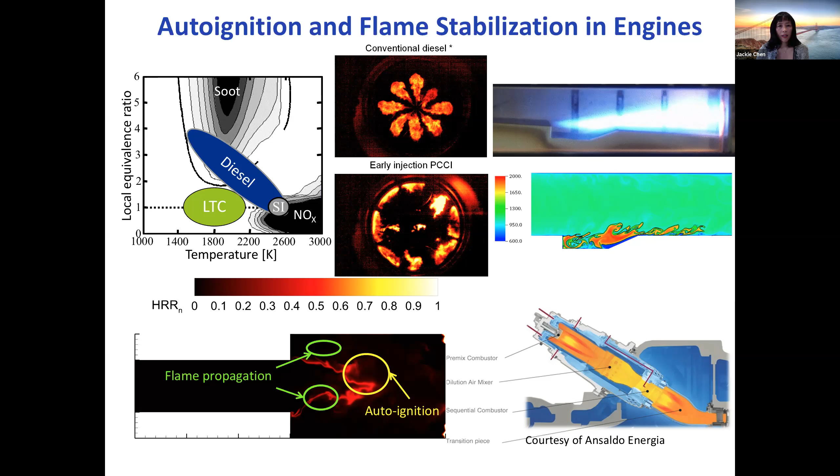So combustion will continue to be the dominant source of energy for ground transportation, for power generation, and for propulsion for several decades to come. And despite the expected growth in electric vehicle sales, both due to plug-in hybrids as well as battery electric vehicles, the global light-duty fleet, the passenger cars, will still be dominated by vehicles with internal combustion engines in the coming decades. And so there's a real need to improve the internal combustion engine efficiency as an important path to energy security and also to minimize and mitigate greenhouse gas emissions

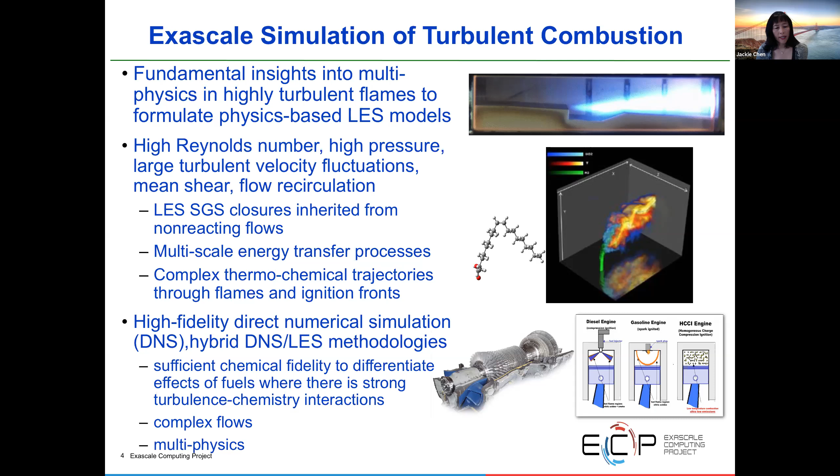So DNS, direct numerical simulation, is a fundamental tool where all of the fluid mechanical scales, from the largest energy containing scales down to the Kolmogorov scale, are fully resolved numerically using highly accurate methods. And then we couple this with reactive flow. And so it's a tool for understanding the micro scale turbulence mixing interactions that occur in combustion that are oftentimes very difficult to measure. The diagnostics and the environments are extreme, and so it makes it very hard to actually measure these small scale interactions.

But because in combustion, you don't burn things until they're molecularly mixed and react, those kinds of physics can have a very strong bearing on macroscopic quantities like the heat release rate or the fuel consumption rate, which may not be resolved in a typical engineering CFD, a Reynolds averaged Navier-Stokes solver, or in a large eddy simulation, where those small scale interactions are relegated to the subfilter models.

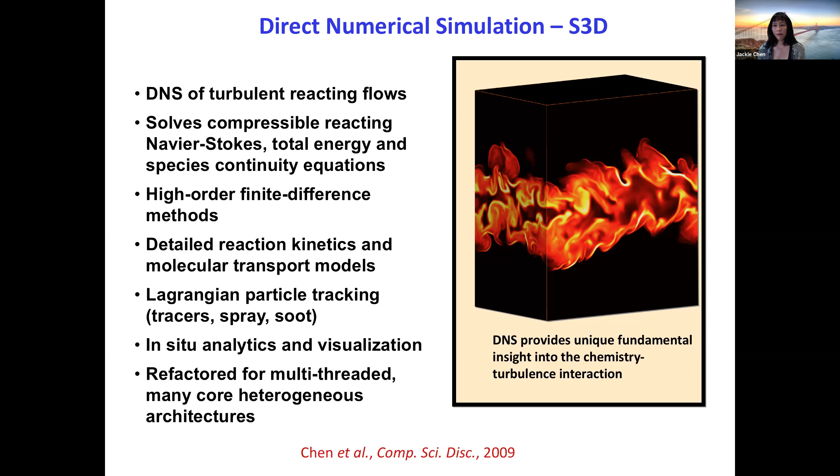So there are still some challenges outstanding in trying to understand mixed mode combustion. That is where you might have flames burning into a reactive or autoignited mixture. And so problems like autoignition, and in an IC engine, you traverse a very broad range of temperatures and pressures. And so you can encompass low temperature, intermediate temperature, and high temperature autoignition at the same time that you have premixed or partially premixed flames, cool flames or high temperature flames propagating into this reactive soup. Current models don't handle this sort of mixed mode combustion.

And so there are a number of technological questions, as shown in this picture, of how we can understand how to stabilize a diesel jet flame in this low temperature combustion regime where you burn with more EGR dilution to avoid the production of soot.

And in gasoline engines that are spark ignited, where there's a move to dilute heavily also with EGR, lean and dilute operation to minimize NOx formation. Likewise, in the propulsion arena, there are challenges with how to anchor high-speed flow in a scramjet, for example. What kind of bluff bodies or cavities are needed to help anchor the flame.

And then in gas turbines for power generation, there's a move to go to staged or sequential combustors, where the second stage would introduce hydrogen-enriched fuels that could be a byproduct of some of the renewable energy, that wind and solar that we're using, that are augmenting natural gas.

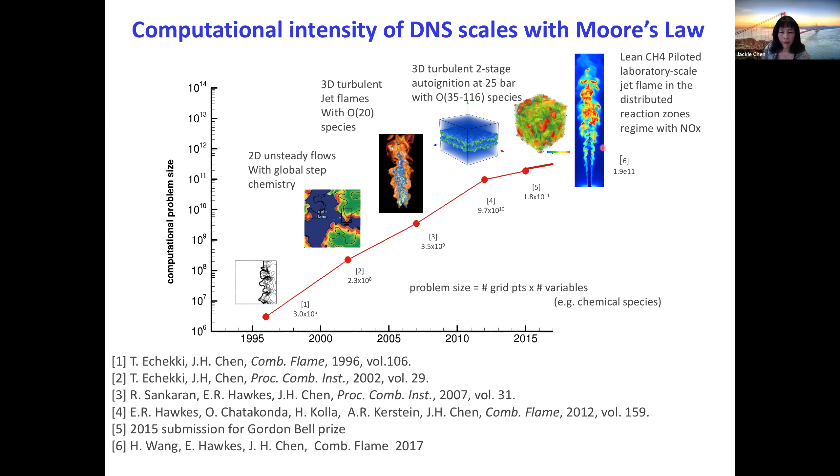In practical engines, these flows are at very high Reynolds numbers with large fluctuations sometimes in both pressure and turbulent fluctuations. They're often present with complex flows, not just isotropic turbulence, but within the presence of mean shear or flow recirculation. And by and large, many of the LES closures that we use today are inherited from our knowledge of non-reacting flows.

And so there's questions still about multi-scale energy transfer processes, dilatation and gas expansion that's generated at the small scales. Where do they move in the energy spectrum? And very, very complicated time histories through these thermochemical trajectories through flames and ignition fronts.

And so my effort has been to focus on high fidelity simulations, in particular DNS, as well as getting involved in hybrid DNS and LES methodologies. And we're doing this in a way that we can resolve the chemical fidelity sufficiently to be able to differentiate subtle effects in differences in fuels where there are very strong turbulence chemistry interactions.

Over the years, we've started to move from DNS in a box, the size of a tofu cube, now to more complex flows involving staged combustors and also more geometry and also multi-physics with sprays and soot.

The code that I've developed at Sandia over the years is called S3D. It's a compressible reactive Navier-Stokes solver, solving for the total energy and species continuity equations. Recently, we've included multiple temperatures, accounting for vibrational non-equilibrium in addition to just thermal equilibrium. We use higher order finite difference methods. We're 8th order in space, central difference, and 4th order in time using a 6-stage explicit RK method.

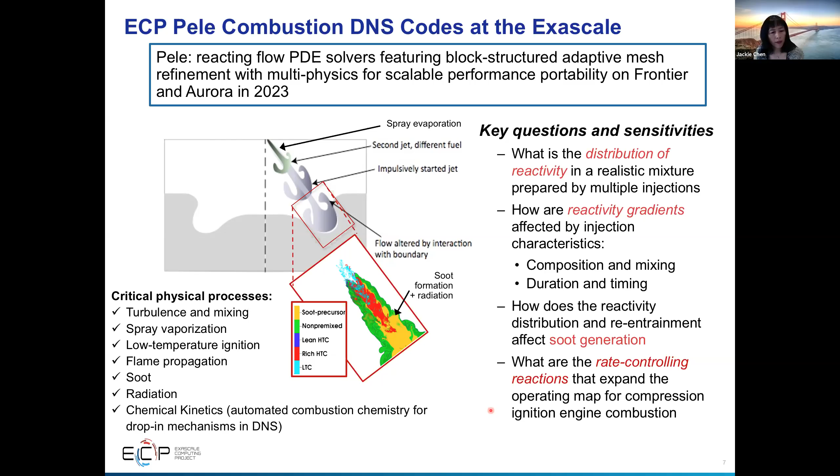To describe a practical fuel of interest, such as gasoline or a surrogate of gasoline, such as isooctane, can require hundreds, if not thousands, of species. And so a big part of our job is to identify reduced mechanisms that capture the accuracy in the regime in which we want to use it.

And so back in the early 1990s, we were only able to perform 2D DNS with somewhat complex chemistry, but really had no turbulence, you had no vortex stretching. And then as time progressed, we started to include 3D calculations with about 3.5 times 10 to the 9 mesh points, but with very simple hydrogen or methane chemistry. And then today, we're at the point now where we can actually simulate directly a smallish laboratory scale turbulent flame and do one-to-one comparisons in terms of the statistics sampled at different axial positions or however you want to analyze the data.

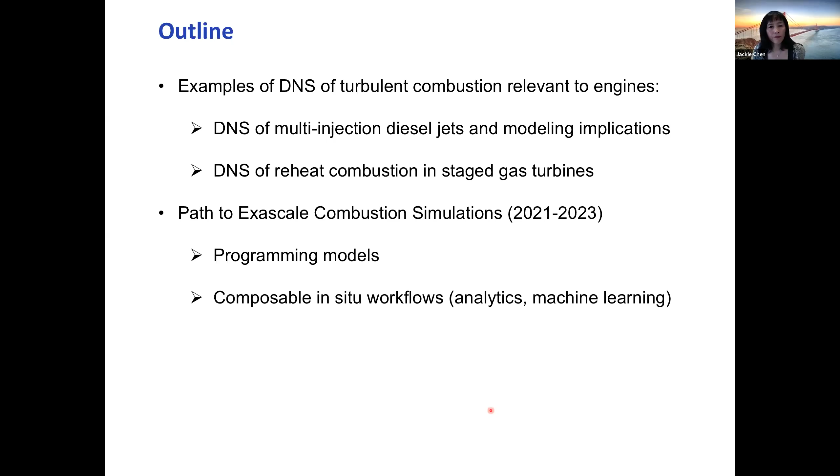And so this is a real accomplishment because we can now directly couple with experiments, and computation can inform one another of either new experiments to perform or new ways to analyze the data to extract information for model development.

Within the DOE, since about 2016, there's been a huge push to develop application codes, I think 22 or 23 application codes, along with a capable software stack with new hardware that minimizes power use, power footprint. And so in that exascale computing project, one of the applications is combustion. And I lead a project called Pele, which is reactive flow PDE solvers using block structured AMR with multi-physics, as I said, sprays, particles with soot and thermal radiation and embedded boundary capability in this code.

And our objective is to get scalable performance portability on the exascale machines that will be deployed in the next few years. And I should say this suite has two codes. One is a low Mach code where the acoustic waves are filtered out, and you can take time steps on the order of advection. And the second code is a compressible formulation capable of handling shocks and acoustic detonation types of phenomena. Both are coupled with the multi-physics modules for chemistry and thermodynamics.

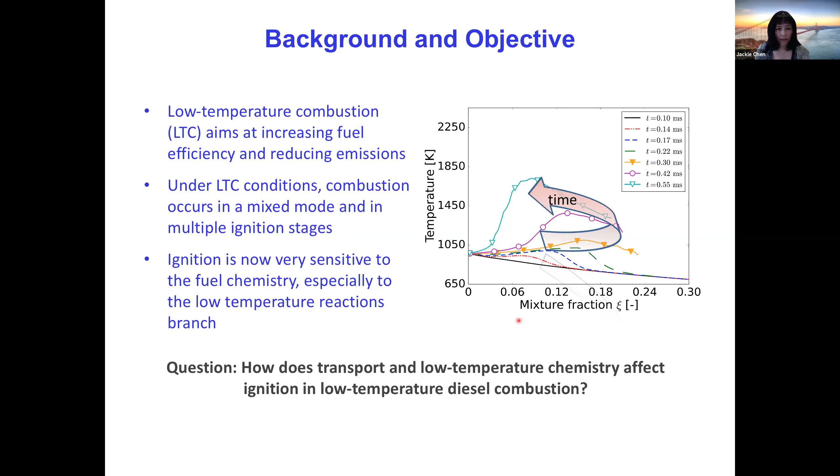And so some of the questions we want to address are: how are the reactivity gradients affected by the composition and mixing characteristics, the duration of a given injection and the dwell time between injections, how many injections, which fuels, which component, are these fuels multi-component? And then how does the reactivity distribution and re-entrainment affect downstream emissions generation for soot or thermal pyrolysis? What are the rate controlling reactions? Can we identify those that could help expand the operating map for efficient operation of these compression ignition engine combustion regimes?

As part of this Pele project, we are working closely with the chemical kinetics group at Argonne, coupled with Bill Green at MIT, and with Tianfeng Lu, that's based on ab initio theoretical calculations, and is tested using uncertainty quantification methods that would then be able to be reduced and produce drop-in mechanisms for our DNS. Previous to this, it would take years to develop a detailed chemical model, and then you'd have to pass it off to someone else to reduce it. And so by the time you could actually see these reduced models in our CFD calculations, it would be a very lengthy time. So we've shortened this enormously by developing this kinetics framework within this ECP project.

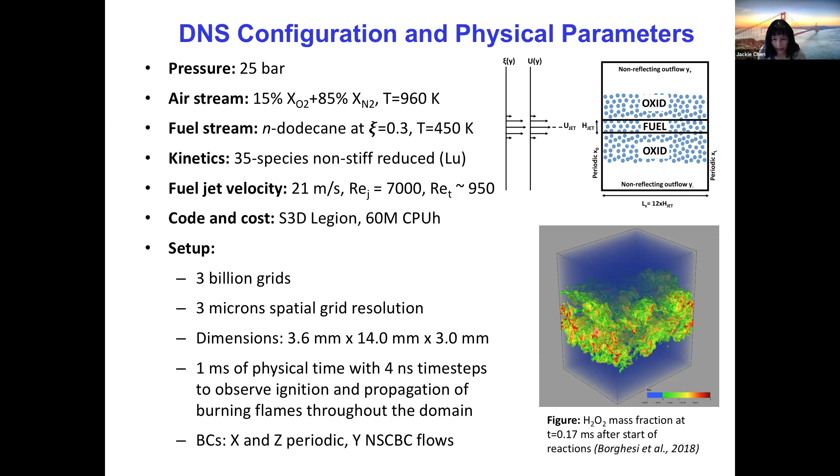Now I'd like to just present a couple of vignettes showing the capability of DNS on current petascale, produced on Summit at Oak Ridge National Laboratory. These are IBM and NVIDIA GPUs. I think there are 6, and I think there are about 4,000 nodes, a little bit over that on Summit. And so the first example has to do with multi-injection diesel jets and modeling implications. And the second example has to do with sequential staged reheat combustion in gas turbines for power generation.

And then I'll switch gears and talk about some of the computer science issues associated with how do you program these exascale machines. Are the current distributed programming models that we use with MPI and OpenMP sufficient, or do we need to look at some other programming models?

I'd like to also touch upon in situ analytics and a little bit about machine learning before I close. So the first vignette has to deal with autoignition under diesel-like conditions. We start with a simpler temporally evolving planar jet using S3D, and then we will move to a spatially evolving impulsive jet so that we could deal with multiple injections using the new code PeleLM. This is work that was done by my former postdocs, Giulio Borghesi, Alex Krisman, and in collaboration with Tianfeng Lu.

We were motivated by this problem because diesel combustion involves both multi-stage ignition as well as mixed mode combustion, as I pointed out earlier, under these low temperature combustion conditions. And there's a push, of course, to try to increase the fuel efficiency and reduce emissions, especially for heavy duty engines, for trucks, and for marine engines. And we know that ignition is extremely sensitive to the fuel chemistry and especially to the low temperature reaction branch.

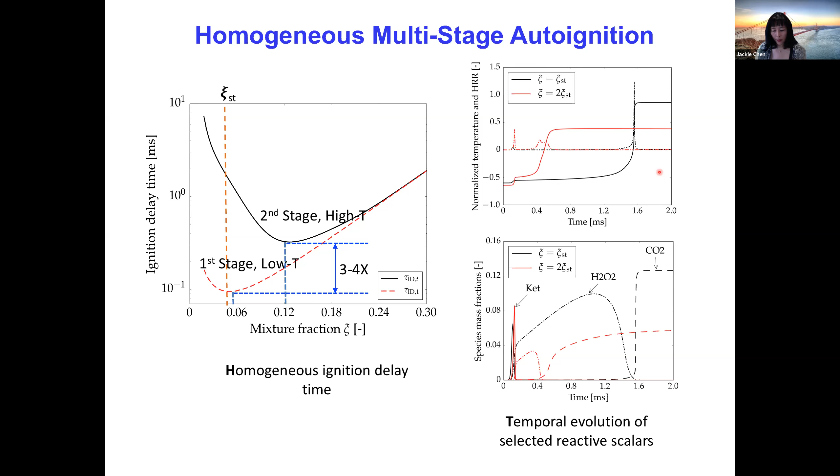This picture on the right shows the temperature plotted versus the mixture fraction and its evolution in time for diesel autoignition problems. Initially you have this mixing line, and then you start to see low temperature ignition processes happen near the minimum ignition delay time, which I'll describe in a minute. And then it propagates into richer mixtures where the delay time is longer. Eventually you get the first high temperature ignition by the time of this yellow line, where the temperature peaks on the very fuel rich side, and then it propagates back to stoichiometric conditions right around here, about 0.06. And so that's kind of the evolution.

So what we set up here, as I said, was a temporal slot jet where we have a partially premixed fuel slab at a mixture fraction of 0.3. This is a mixture fraction selected at a virtual origin downstream of where the liquid fuel has evaporated, because we're looking at a pre-vaporized mixture, a rich mixture at 450 Kelvin, and on either side of the fuel slab is the oxidant, which is reduced air with 15% oxygen, 85% nitrogen at a heated temperature of 960 Kelvin.

We ran this calculation at 25 bar. We wanted to be at 60 bar, which is where engine experiments were actually conducted, but the resolution requirements were prohibitive. We used a 35 species non-stiff reduced mechanism. The fuel jet was 21 meters a second. This gave us a jet Reynolds number of 7,000, a turbulent Reynolds number of just under 1,000. This was run with the code S3D Legion, which I'll talk about later in my talk, and required 60 million CPU hours running on Titan and also on Summit.

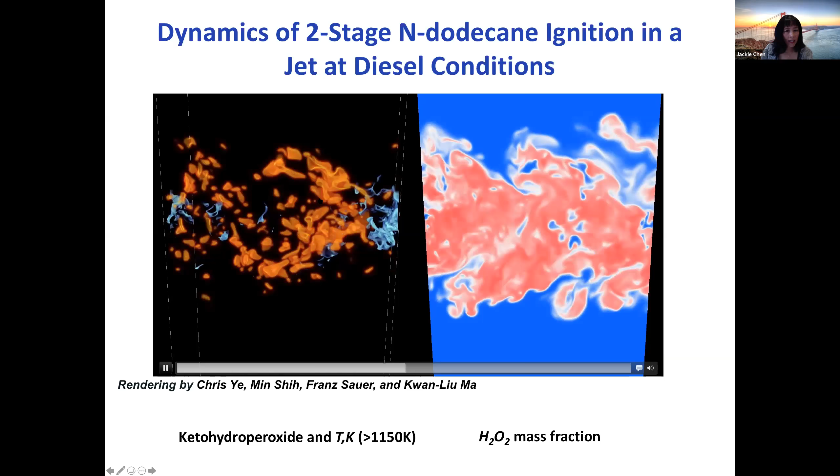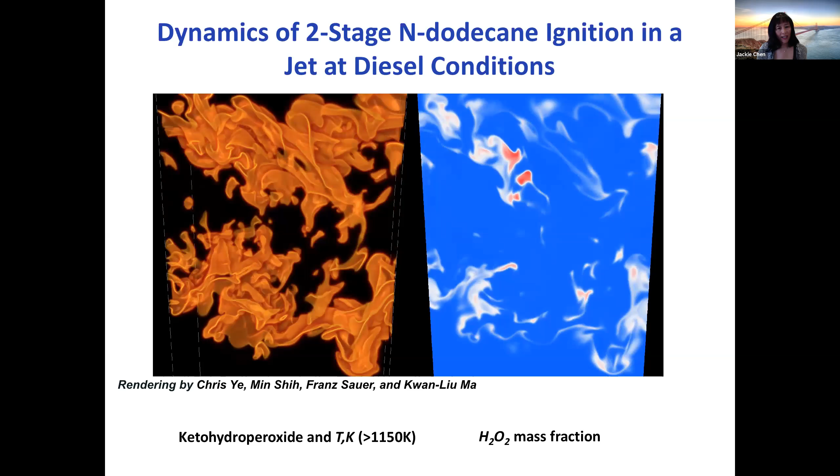For those of you that aren't familiar with autoignition, this is a homogeneous 0D reactor, and it plots on a semi-log plot the ignition delay versus the mixture fraction. It's been known and brought forth by Mastorakos that there's this so-called most reactive mixture fraction, a point of mixture fraction for which you get the minimum ignition delay, both for low temperature ignition as well as for high temperature ignition. Low temperature ignition delay versus mixture fraction is plotted with the red dashed line, whereas the black solid line denotes high temperature ignition.

And so you can see the delay time is the shortest at about 0.06, just slightly rich of the stoichiometric mixture fraction, and occurs at 0.12, almost twice the mixture fraction of the low temperature ignition, for high temperature ignition. And we can also see that on the rich side, there's not a whole lot of separation in time between the low and the high temperature ignition.

Now, one other interesting feature that we can learn from these 0D reactors is that the low temperature ignition occurs much sooner than the first high temperature ignition would occur, almost by a factor of 3 to 4 times. And hence you would expect that most of the low temperature ignition will have been completed in the turbulent jet before commencing high temperature ignition.

And so in this n-dodecane surrogate for diesel fuel, the chemical mechanism is such that you have low temperature ignition, which is characterized by hydrogen abstraction reactions, successive oxygen addition, internal isomerization reactions. And these reactions with keto hydroperoxide end up producing OH radicals through chemical chain branching. It also raises the temperature, maybe about 100 to 200 degrees Kelvin.

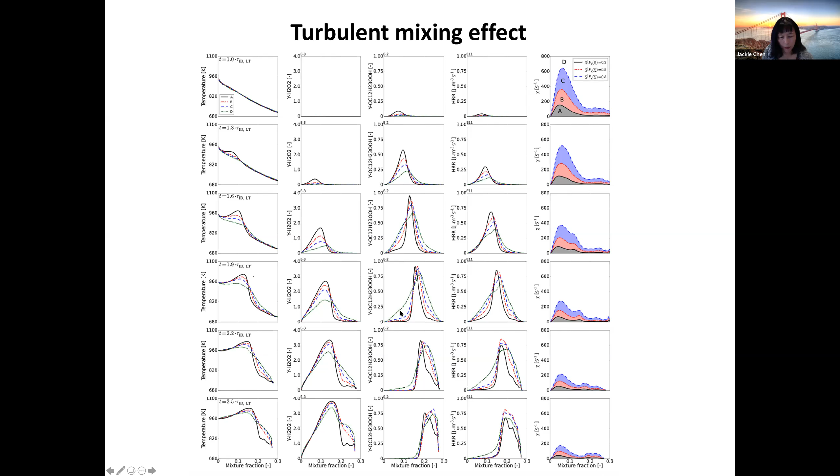So there are a couple features to note. First, we find that even in the turbulent case, the first ignition that happens occurs at the preferred mixture fraction of about 0.05, as predicted from homogeneous ignition delay. But the first ignition happens later than homogeneous ignition delay because of the high turbulent mixing rates. It dissipates some of the reactive species and enthalpy, and so you end up having a little bit longer ignition delay time.

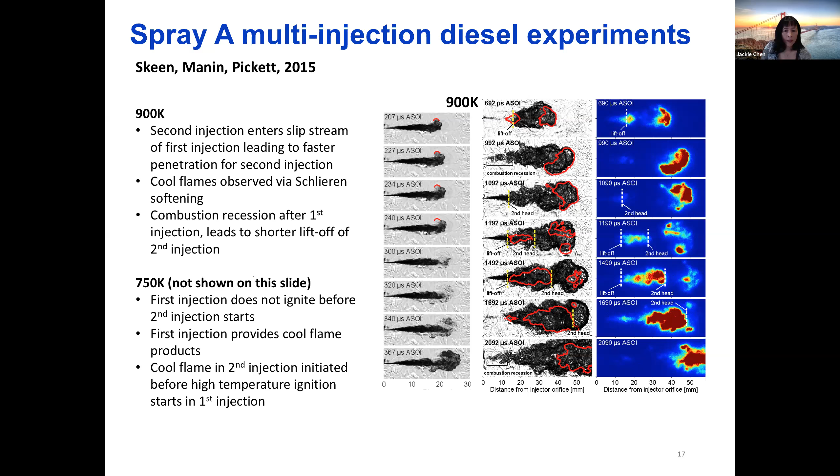But the most interesting thing that we discovered is that under these rich conditions, you can actually ignite faster than you can under the homogeneous 0D reactor. And that is because of transport phenomena. And so we find high temperature ignition actually occurs at about a mixture fraction of 0.16, which is much richer than would be predicted from the 0D reactor prediction, which would have been about 0.12.

So you ignite under high temperature conditions at richer conditions due to the bootstrapping of these cool flames and turbulent mixing that brings intermediate species and enthalpy to help bootstrap the spontaneous ignition occurring under very rich conditions that takes a lot longer. And in doing so, you end up having faster ignition under richer conditions than you would get if you just relied on a reactor prediction.

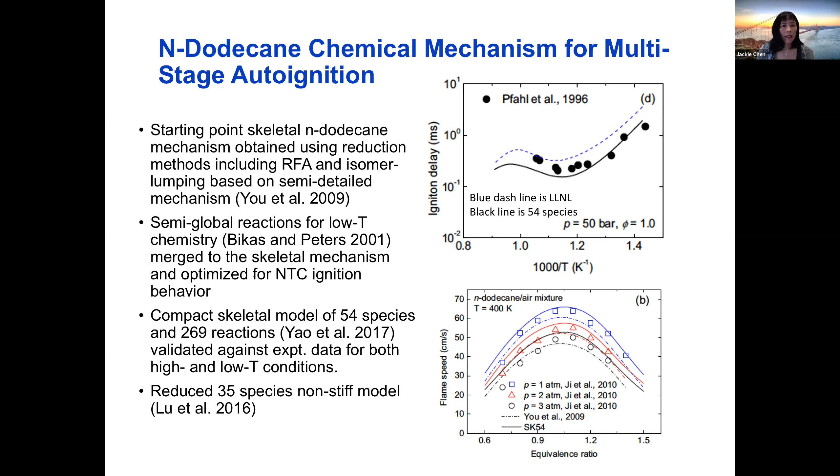So on top of this, we then moved to the spatially evolving configuration to look at the influence of multi-injections, with an eye to trying to improve flamelet modeling. And so this is work done with Martin Rieth, my postdoc, in collaboration with Mark Day at Lawrence Berkeley, Christian Hasse at TU Darmstadt, and Tianfeng Lu, a student at University of Connecticut.

This problem is motivated by spray A, an experimental spray jet in a high pressure vessel to mimic multi-injection diesel experiments. The experiments were conducted by Scott Skeen and Lyle Pickett, and the most interesting parameter they varied was the ambient temperature of 900 Kelvin, and then they also ran it at a lower temperature of 750 Kelvin.

With experiments at these kinds of 60 bar pressures, they're limited to what kind of diagnostics they can apply. And so in this case, they used Schlieren imaging and planar laser-induced fluorescence of formaldehyde, shown on the right column, as a function of time after start of injection.

And so some experimental observations are that they see that the second injection, well, first they see ignition occurring on the head. It's denoted by these red arcs in time, where you see some softening of the Schlieren image. Those denote cool flame ignition.

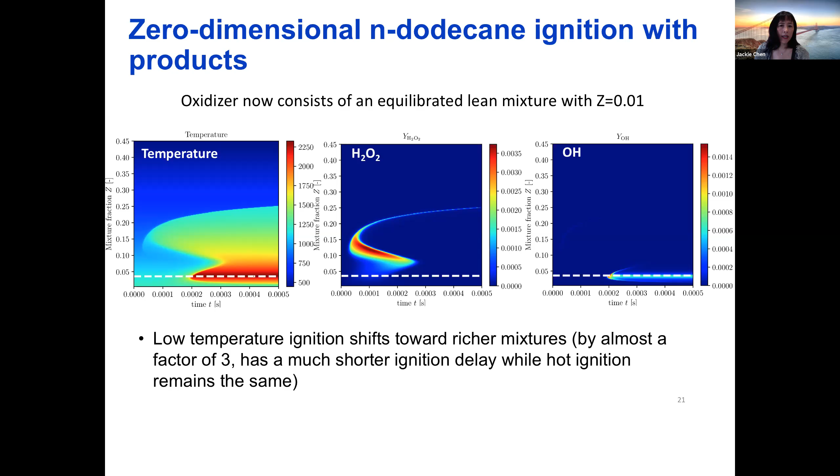And then what they see is the second injection, which occurs here, enters the slipstream of the first injection, which shortens the ignition delay time for the second injection, leads to a faster penetration for the second injection. And we also see combustion recession after the first injection, which leads to a shorter liftoff distance for the second injection.

What they observed at 750 Kelvin, on the other hand, is that they didn't even see the first injection ignite before the second injection started. And they found that the first injection, they could see some evidence from formaldehyde imaging of cool flame products that may help bootstrap and successfully ignite the second injection.

And so there's a role of cool flame perhaps in the second injection that's initiated before high temperature ignition starts in the first injection at these lower ambient temperatures. But that's kind of the extent of the information they can get from limited diagnostics.

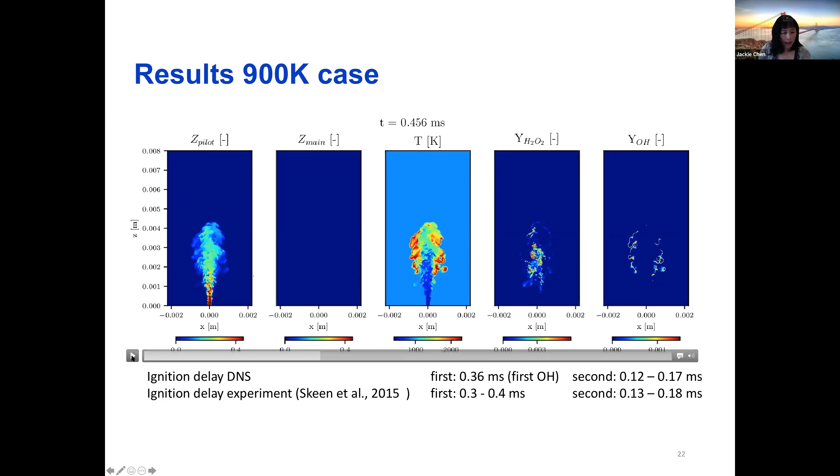So we thought we could help augment that understanding by performing DNS using this adaptive mesh refinement code PeleLM. And we tried to mimic the experimental conditions as best we could with ambient temperatures of 900 Kelvin, 750 Kelvin as in the experiment, reduced oxygen, and at 60 atmospheres. We downscaled the ECN spray A. We kept the Damköhler number constant.

The Damköhler number is the ratio of the large scale integral time scale compared to the flame time. And the jet Reynolds number here was 19,000, very low Damköhler number of the jet. So very intense turbulence conditions. We downscaled the diameter of the jet by a factor of 9, and we also correspondingly scaled back the velocity by a factor of 9.

And we kept the same injection schedule as in the experiment, which was a half a millisecond pilot, half a millisecond dwell, and that was followed by a half a millisecond injection of the main diesel jet. Because we were at 60 bar, we had to resolve even finer, down to 1.25 microns to capture the structure of the rich premixed cool flames.

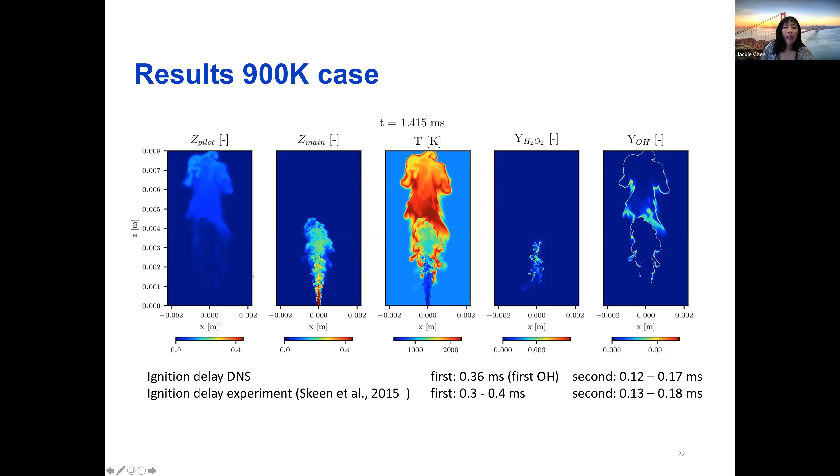And we ended up using a 35 species n-dodecane mechanism developed by Yao et al. And that was used in the previous calculation by Borghesi that I just described. PeleLM is this low Mach AMR code using a spectral deferred correction method for the coupling between the flow and the chemistry.

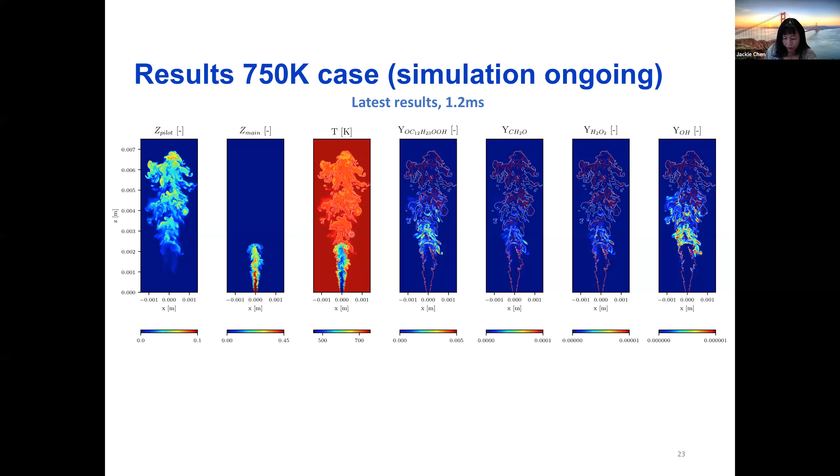I will just point out that the mechanism we ended up using was built on a USC semi-detailed mechanism for the high temperature chemistry, and then appended to that were some semi-global reactions for low temperature chemistry, lumped, modeled by Bikas and Peters, that were merged to the high temperature chemistry and then tuned and optimized against the Lawrence Livermore low temperature detailed chemistry, and against some of the spray A experimental data to tune the NTC ignition behavior.

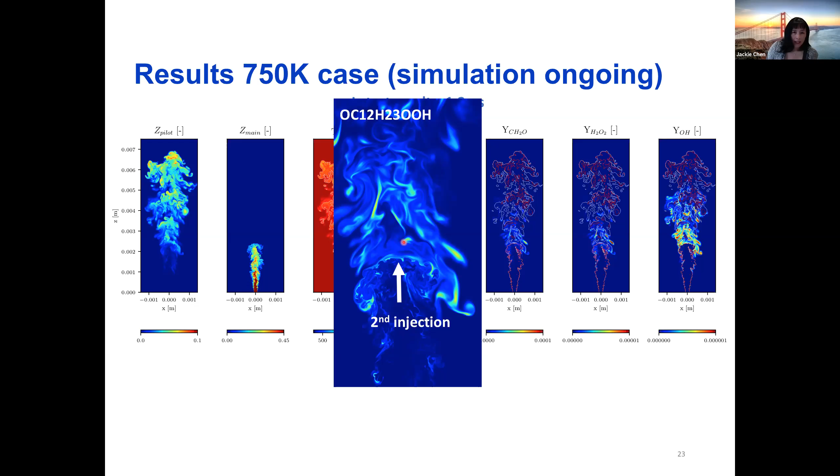So once we had a compact 54 species skeletal model, we then asked Tianfeng to reduce that and remove the stiffness such that we could transport 35 species. This just shows some plots of the verification of the ignition delay of the parent detailed model compared with the skeletal model, as well as the flame speed propagation. The propagation speeds as a function of the equivalence ratio at a couple of different pressures.

So with this problem, we also went back to the reference 0D reactor calculation again. I apologize, I flipped the axes on you. The mixture fraction is now the y-axis, and time is the x-axis. But you can see temperature, hydrogen peroxide and OH. Peroxide is a marker of the low temperature ignition, whereas OH demarcates the high temperature combustion.

We see that there's two stages of ignition, as we saw earlier, and that for these conditions, low temperature ignition occurs at a preferred mixture fraction around 0.05, whereas high temperature ignition occurs close to stoichiometric.

One thing we did with this 0D reactor, which was quite interesting, is that we doped it. We added a little bit of products of combustion to the oxidizer stream, which now consists of an equilibrated lean mixture of mixture fraction of 0.01. Even adding just a tiny bit of product gases to the oxidizer stream vastly changes the ignition picture.

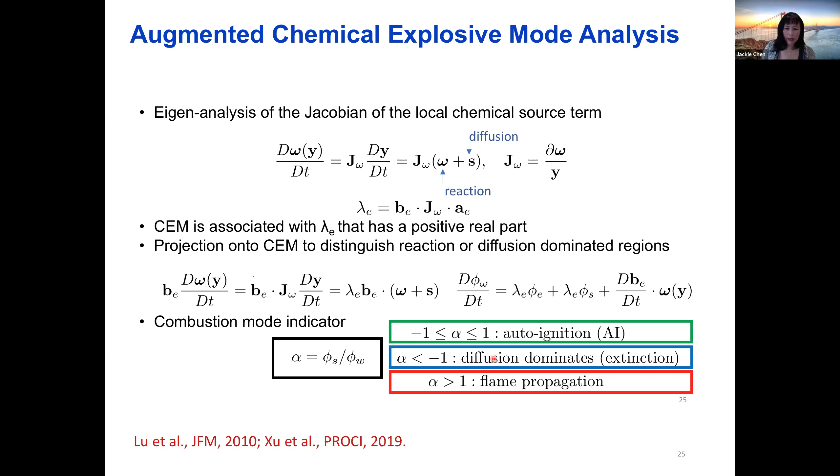What you find is low temperature ignition, as demarcated by H2O2, now shifts to very rich mixtures, 0.15. Before I said the minimum ignition preferred mixture fraction was 0.05. So it's gone a factor of 3 in richness, and it also has decreased the ignition delay time by almost a factor of 2. So entraining hot products can greatly change where ignition occurs in composition space, and also reduce ignition delay.

So I'll show you results first for the 900 Kelvin case. And what you're going to see in this movie is the mixture fraction of the first injection, the pilot, on the left frame, followed by the mixture fraction of the second main injection. And then you'll see temperature in the third frame, the low temperature marker, H2O2, in the fourth frame, and the hydroxyl radical in the fifth frame, demarcating the high temperature combustion.

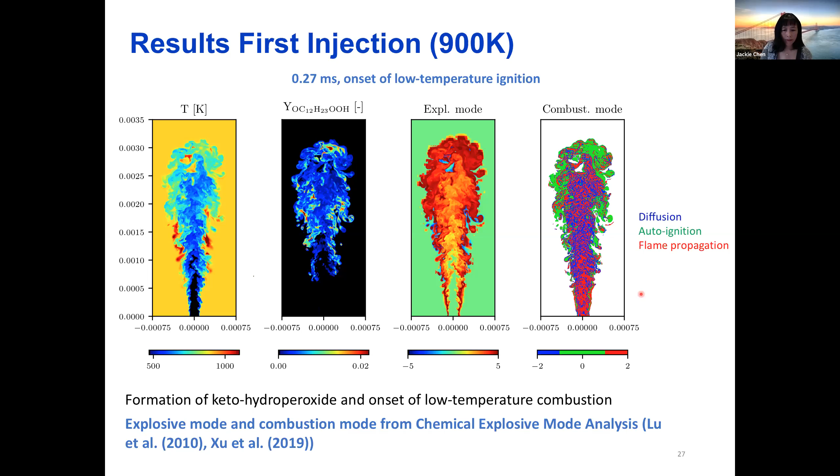So initially the pilot is injected. Whoops. And you see as the pilot is injected you have low temperature ignition occurring as you see in the third frame from the temperature. And then we see in the rich side of the flame this generation of ketohydroperoxide, hydrogen peroxide, and formaldehyde. And then you start to see high temperature flame appearing with OH radical along the periphery of this jet.

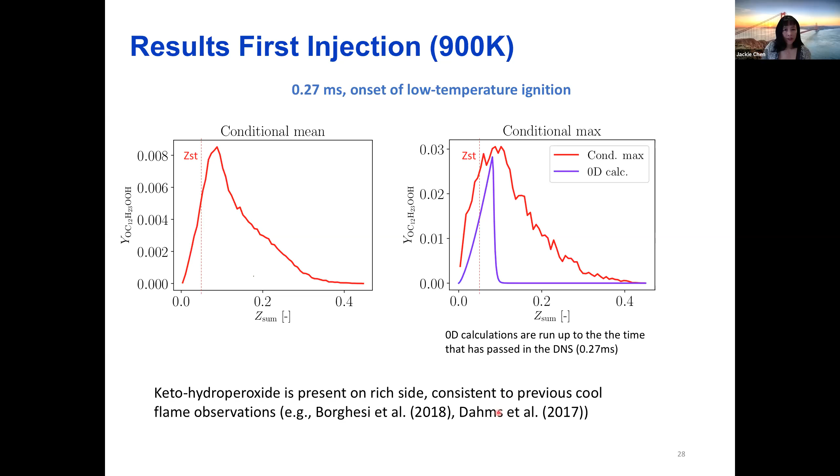If I play the movie a little further, then we have the main injection coming in, and it's injecting into hot products of combustion left over from the pilot. And so it mixes and entrains hot pilot products that help bootstrap the second main ignition. And we also see here that recession of the second injection.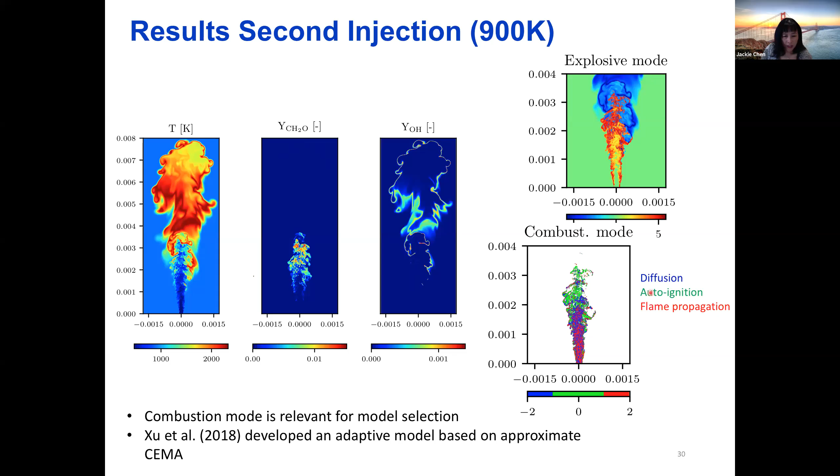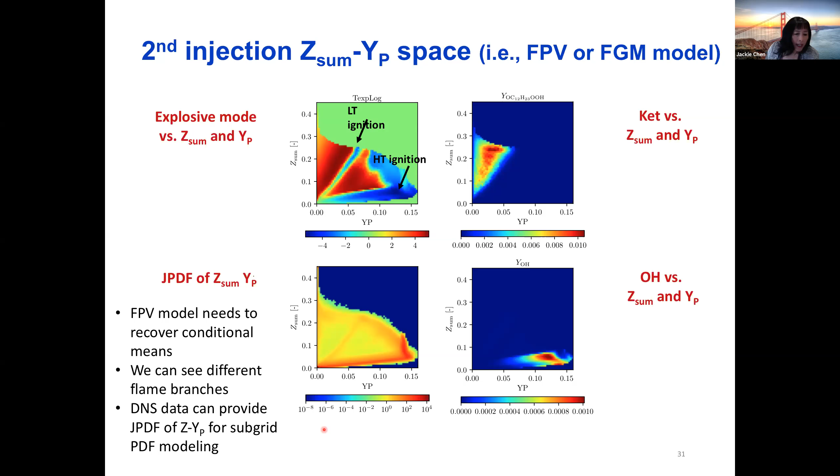And so the eigenvalue lambda E that has positive real part is associated with the chemical explosive mode, and is used to delineate any kind of reaction front where the zero crossing to negative values of that eigenvalue occur. And if we project the governing equation onto the left eigenvector B sub E, then we can distinguish between reaction or diffusion dominated regions through this combustion mode indicator that Tianfeng is calling alpha, which is the ratio of the diffusion to reaction terms.

And so when the alpha parameter is large and greater than 1, you have diffusion assisted flame propagation. And when alpha is less than 1, you have chemical reactions dominating over diffusion, and so you have autoignition. And then when alpha is less than -1, diffusion dominates and there's a propensity to quench. And so this becomes a very useful diagnostic for us to determine in different regions of this jet what kind of combustion mode is happening to inform modeling.

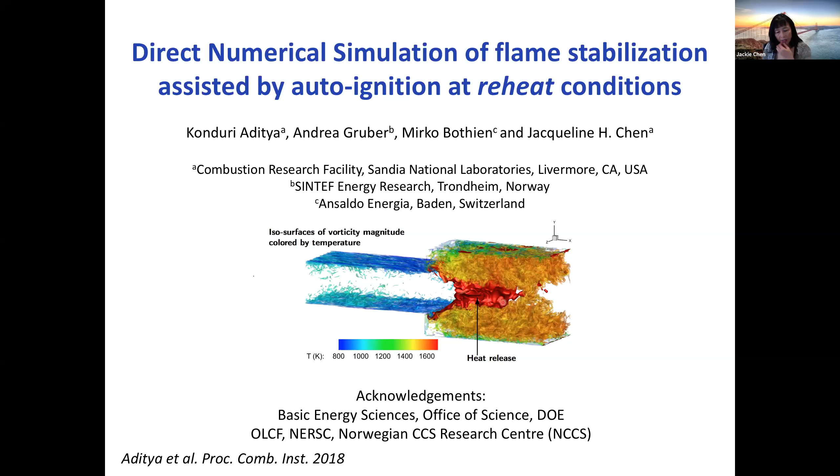So if we look at the 900K results, which I showed in the movie, you can see temperature, keto hydroperoxide, the chemical explosive mode. So you can see where temperature is high, you have a crossing between highly explosive modes denoted in red and exhausted modes, negative eigenvalues in blue. So those regions coincide with where product gases exist, where you see the blue spots. Otherwise, the rest of this is highly reactive in the shear layers and in the bulk of this jet.

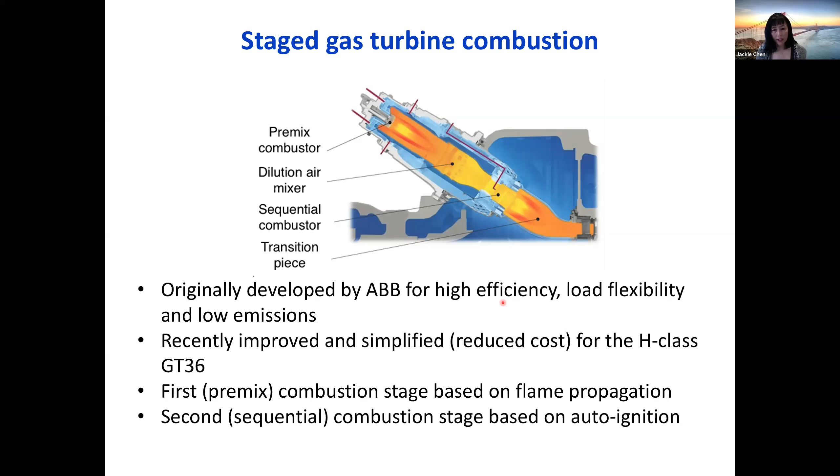Now, if we applied the augmented CEMA analysis, we identified that the periphery of the jet is dominated by autoignition, whereas the interior of the jet is primarily dominated by flame propagation assisted by reaction or autoignition, in addition to the dark blue regions, which indicate local quenching or slowed down reaction due to diffusional losses.

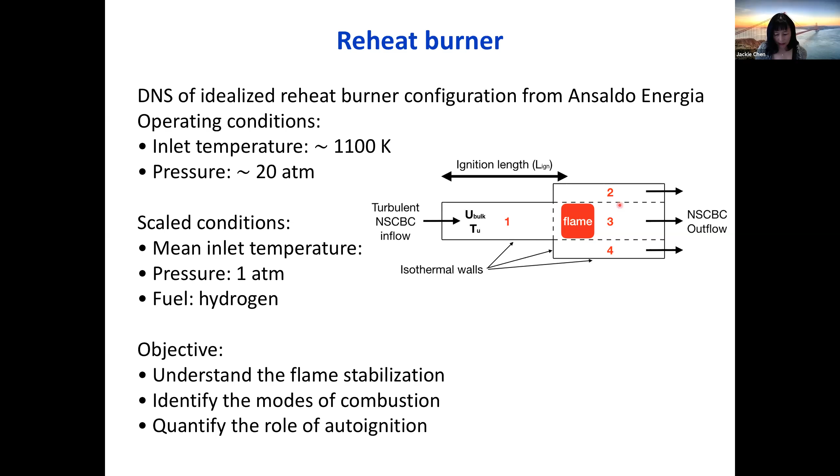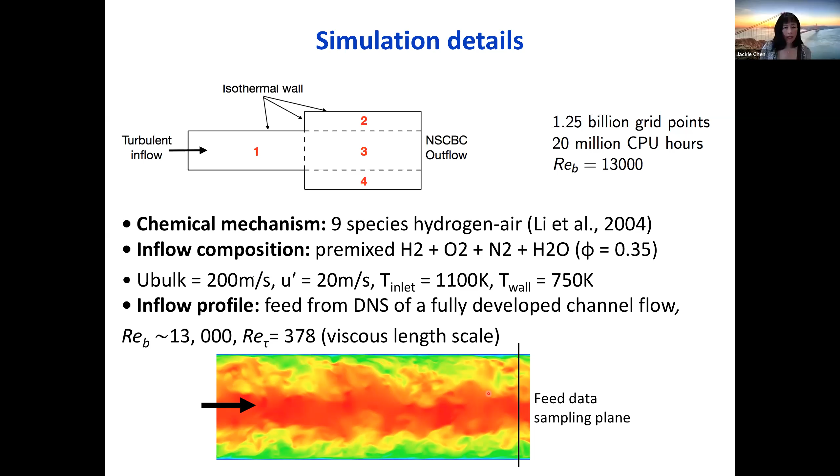The second injection shows a very similar picture. If you look at the second injection for 900 Kelvin, you see the blue and the red denoting the flame propagation aspects, either helping it or hurting it. And then around the outer edge, you see autoignition being the main mode.

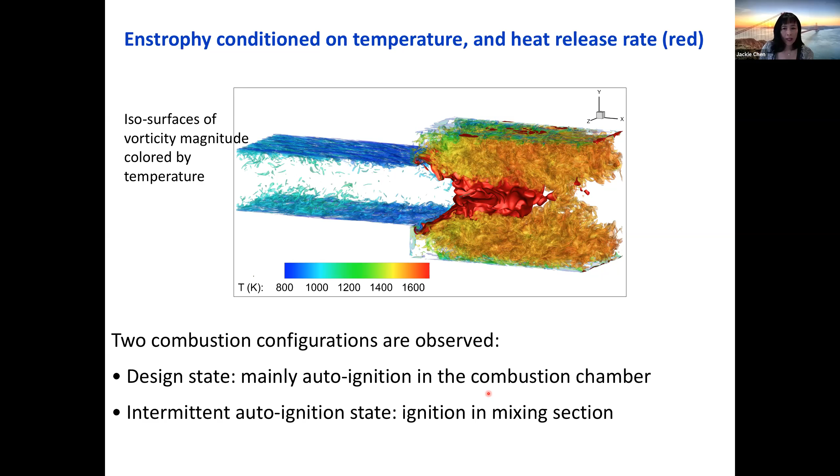We can further get modeling statistics such as the explosive mode conditioned on the mixture fraction sum and the progress variable. And these would be statistics that would be useful for a flamelet generated manifold model or for a flamelet progress variable type of model. And the interesting signature here of multi-stage ignition is the CEMA switches from red to blue, explosive to exhausted for low temperature ignition, and it does it once again for high temperature ignition.

We can see then that the KET and other low temperature radicals like formaldehyde, if you plot them versus the mixture fraction and progress variable, exist in this region where you see very rich conditions and low values of progress variable that coincide with the CEMA analysis for low temperature ignition.

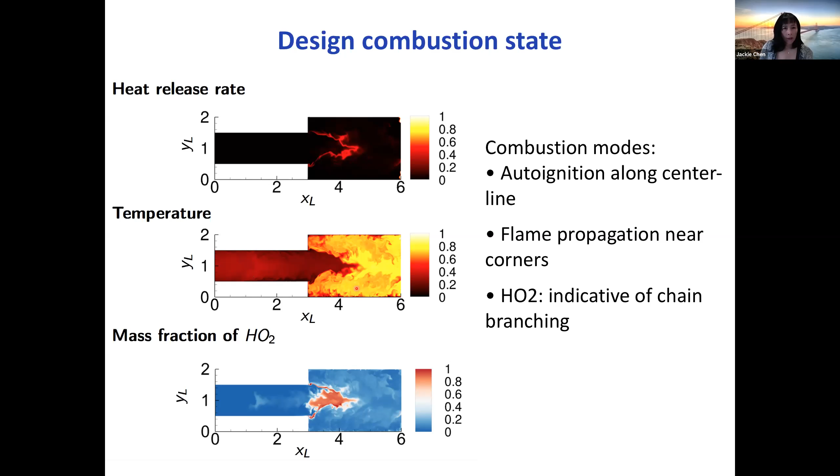Likewise, if you plot OH versus the mixture fraction and progress variable, it lives out in the space close to stoichiometric and under very high values of progress variable, which coincide with the second crossing of the chemical explosive mode indicating the high temperature ignition. And so I think the DNS data can provide a wealth of these kinds of joint PDFs of mixture fraction, progress variable or even age variable for the purpose of subgrid scale modeling.

Okay, and so we performed DNS of the simplified Spray A experiment. We found accelerated ignition for main injection that was consistent with the experiments. We found that the DNS provided a wealth of data for improving both the understanding as well as for model development. The chemical explosive mode analysis is a useful tool to understand which combustion modes occur in which part of this jet. And we found that strong mixing inhibits ignition of the first jet, but it promotes ignition of the second jet.

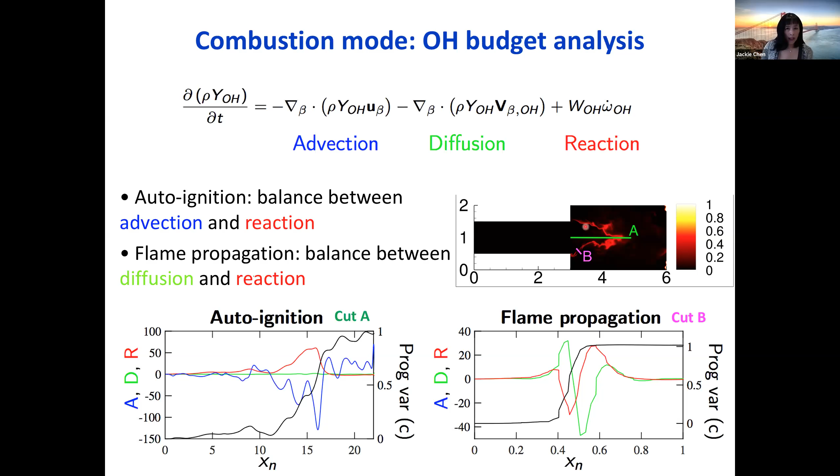I will just briefly touch upon the reheat combustion problem. This is a problem that Aditya Konduri, Andrea Gruber, Mirko Bothien, and I worked on a year or two ago, and involves the sequential staged combustor that Ansaldo Energia is building. It used to be Alstom, the GT36.

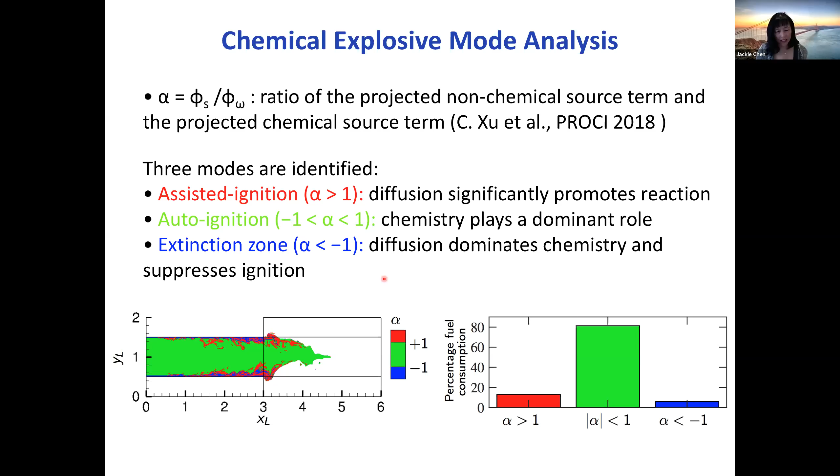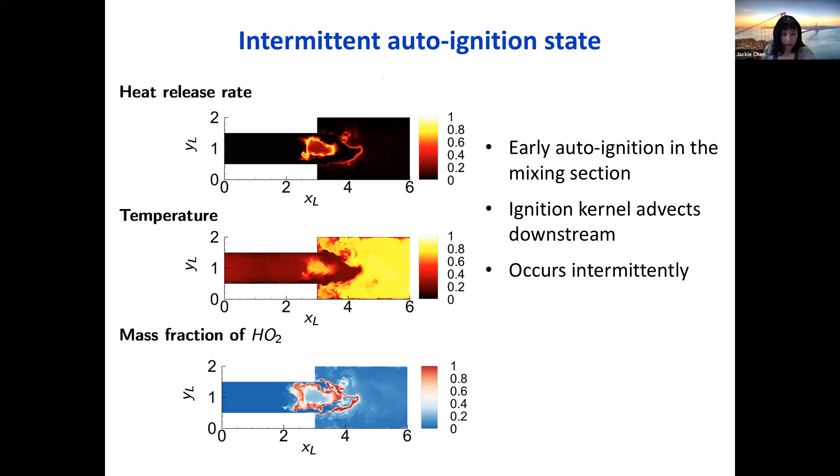This is the DNS configuration here with an inlet temperature of 1100 Kelvin, pressure 20 atmospheres. We scaled it back down to 1 atmosphere first and kept the other parameters about the same. So our objective here was to understand how the flame stabilizes, what are the modes of combustion, and then quantify the role of autoignition. Here we took the S3D code and we extended it to be multi-block. So it's like putting together Lego blocks.

Here there are 4 blocks to comprise the mixing duct, which had a length corresponding to the ignition delay length of that vitiated hydrogen air mixture that was coming in. And then we have the combustor out here. Chemical mechanism was hydrogen air with 9 species using Li et al. The inflow composition was vitiated hot combustion products from the first stage mixed with hydrogen and oxygen to an equivalence ratio of 0.35.

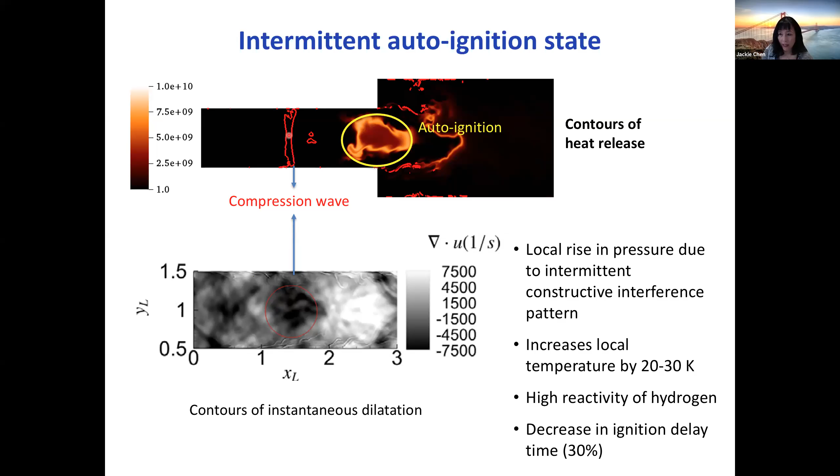The turbulent flow had a bulk velocity of 200 meters a second. 10% of that was the RMS velocity. It's highly preheated inlet at 1100 Kelvin, and the wall temperature was cooled at 750 K. We obtained the inflow profile for the turbulence from running a separate fully developed turbulent channel flow, and then sampling the field data at the inlet plane. The bulk Reynolds number was 13,000, whereas the viscous boundary layer Reynolds number is 378.

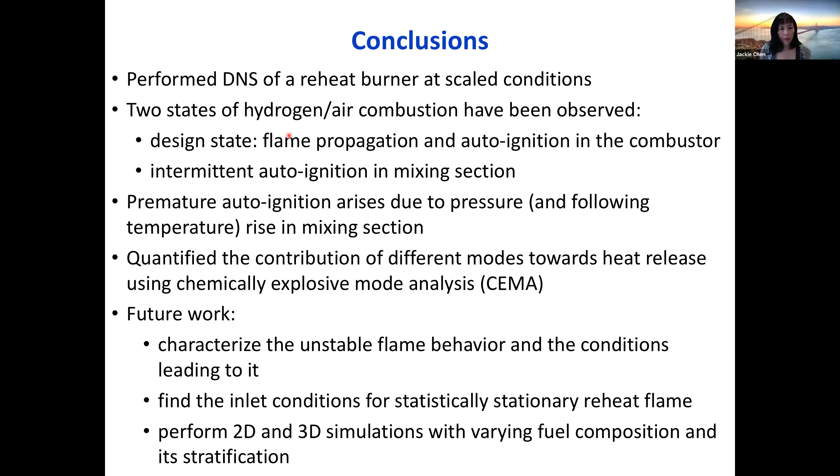In the DNS, we observed two different configurations. One was the design state, which is desirable. We wanted most of the combustion to occur in the combustion chamber, and due to autoignition. But occasionally we would see an intermittent autoignition state where ignition kernels would form in the mixing tube, which is undesirable and could lead to thermoacoustic problems.

So let me first talk about the design combustion state. Here, we've taken a slice of the data along the center plane, and you can see from the heat release, temperature and HO2 mass fractions, autoignition occurring along the center line, whereas just behind the sudden expansion, you have a region of flow recirculation of hot product gases that anchors these thin premixed flames that propagate near the corner from the boundary layer reactants that are too cold to ignite or burn in the duct, but when they encounter these hot products, they ignite and anchor this autoignition in the corners of this sudden expansion.

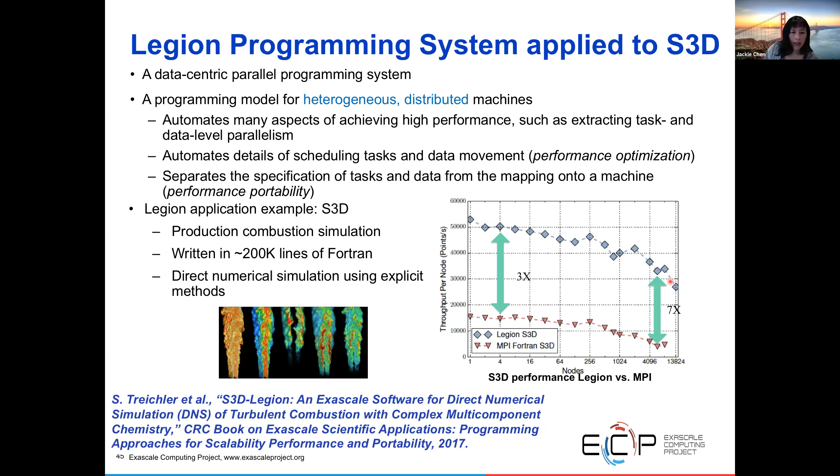We then looked at OH budget analysis to tell us what mode of combustion was happening where. And if you look at the OH radical species continuity equation, there are terms associated with advection, diffusion, and reaction. If we take a cut along the center line of the combustor, point A, shown here in this bottom left plot, we see that there's a nice balance between advection, shown in blue, counterbalanced by reaction in red, where transport diffusion is negligible. And so this is a signature of autoignition happening along the center plane.

If we then take a second cut near the corner, we find just the opposite. We find a nice balance, in this cut B, between diffusion in green counterbalanced by reaction in red, which is the typical premixed flame structure. And so we anticipate deflagration occurring in these corners.

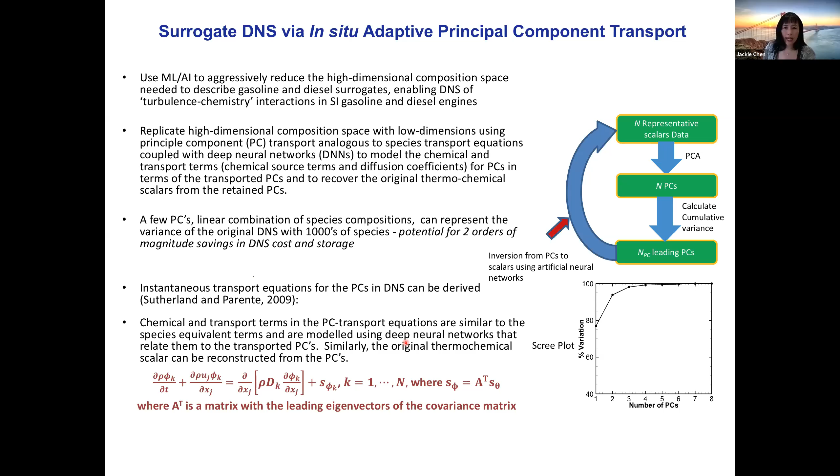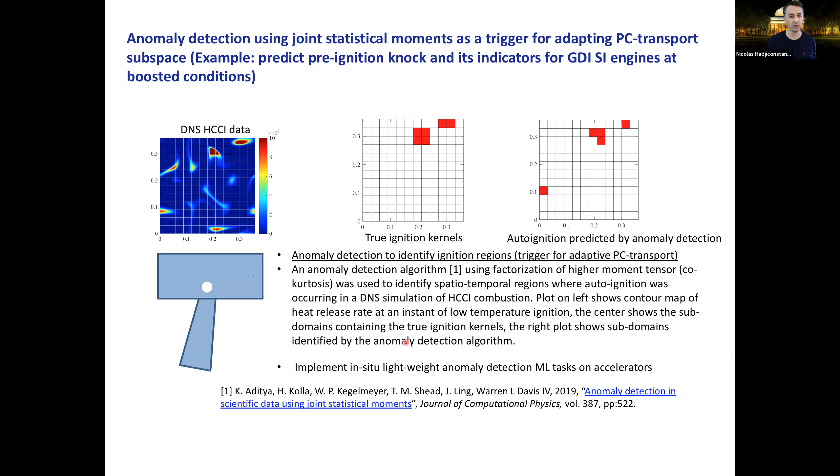The cause of this is due to the autoignition, predominant autoignition in the combustor, which leads to acoustic waves that emanate from these ignition in the combustion chamber that propagate outwards as well as upstream. The upstream is concerning because these waves form constructive interference patterns with the walls, both the longitudinal and lateral waves,

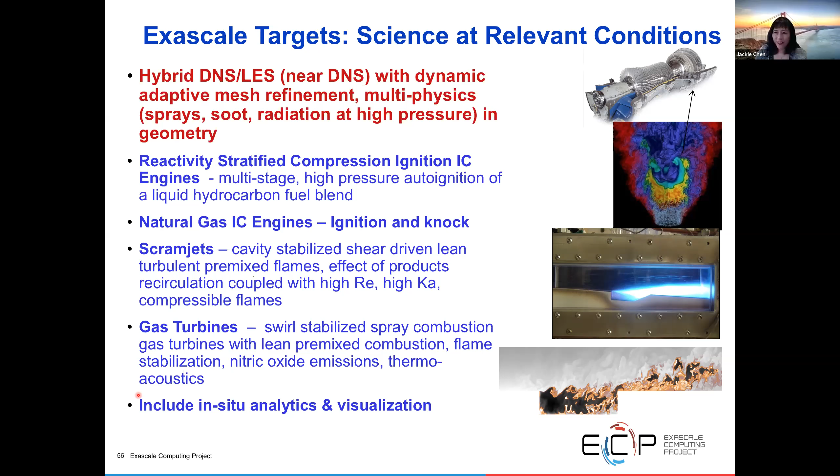So there was a question about the future of particle-based methods and how do they fit within these very massive parallel computing resources that we have now. So is the question related to Lagrangian, like a PIC code, particle-in-cell code? Or just Lagrangian methods for solving the fluid dynamics? I'm only familiar with using particles for solving multi-physics like sprays or soot.

Okay. The only other particle method, I know Ahmed's very good at Lagrangian vortex methods. The only other particle method that we're using is more in the mesoscale, where we're using Monte Carlo simulations. But that's a different regime, right? When we're looking at thermal or chemical non-equilibrium, we're using particle-based methods there. But we're not using Lagrangian vortex methods, and Ahmed's the expert on that.

Okay. So there was one question about the details of the finite difference schemes that you used. What order methods were those? Yeah, so the finite difference method is 8th order centered in space and 10th order filter. And then in time, it's a 4th order explicit Runge-Kutta method by Carpenter and Kennedy. Okay, great. Any other questions?